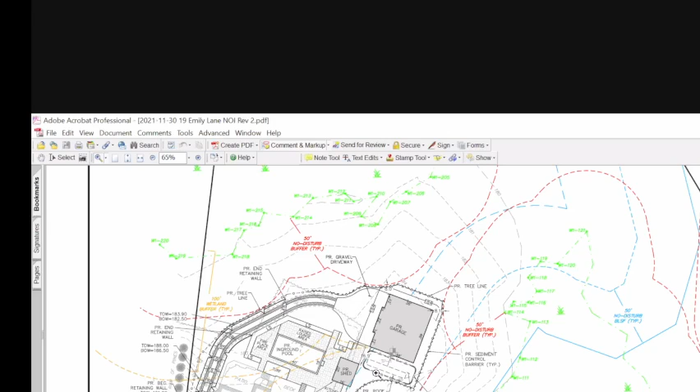We have also designed that rooftop infiltration system, which was originally proposed underneath the gravel driveway. We moved it off to the side of the garage, underneath the proposed stockpile area, so it wouldn't have to accommodate H20 loading and things like that. We've also provided the appropriate detail for that system. We have made the determination that the patio is going to be a pervious paver patio system.

So we can get some groundwater recharge right through the patio itself, and we provided some details on that. We've also updated our sediment control detail to reflect the new Town of Easton standard.

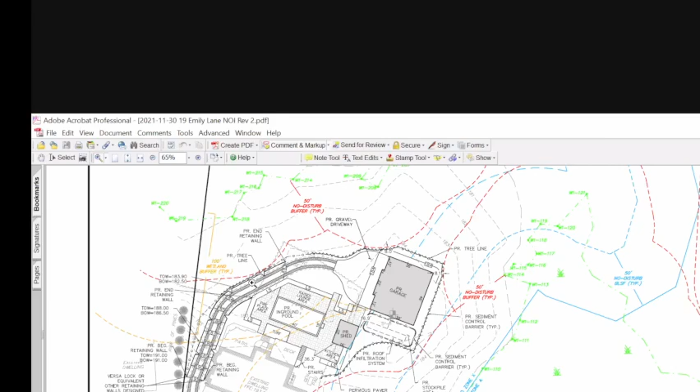We provided a detail for the modular block retaining wall proposed here, noting that the wall is greater than 4 feet. So the final design of that wall would be subject to a building permit and would be designed by a structural engineer. If need be, we could certainly condition that we provide that design prior to installation.

We provided the FEMA FIRM panel number and the LOMA that was approved for the property. They took this portion here and defined the Zone A floodplain boundary.

We've also provided an operations and maintenance plan for the proposed infiltration system in this location, and for the pervious paver patio system, giving the owners guidance on how to maintain it so it works in the long term.

We've also added something not listed in the letter we provided, but there is a note on the plan relative to utilities, which came from discussion between Ms. Carlino and myself: any utilities needed to access this garage, whether gas or electric, need to be installed within the approved limits of work. It would generally come off the existing house through the patio, or go underneath the driveway, but in no case would we extend beyond what we're showing for the limits of work without another authorization from the commission.

The letter we provided also summarizes anticipated stormwater impacts, and the takeaway is that anything we propose could have an impervious aspect to it, whether it's the driveway, the garage, or the pool. We found some way to mitigate that.

The driveway will be constructed of two cobblestone pathways approximating the treads of the car tracks. The area in front of the garage, where there will be some maneuvering, will be gravel, so we can be as pervious as possible through the garage and driveway. The garage is proposed with a rooftop infiltration system, and the patio system will be pervious as well. So anything we can do to mitigate stormwater runoff, I feel we've done. I feel we've met the intention of the stormwater standards to the maximum extent practicable.

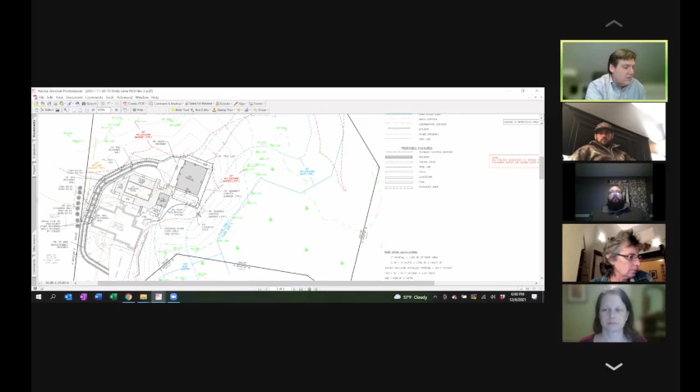I think you've addressed most of the questions I have. I think the stormwater issue is likely addressed here. Is there detail on the plan specifically about the construction of the gravel driveway, how much substructure there is, and how much crushed stone on top there is to be, and all that other stuff? Is that detail in the plans?

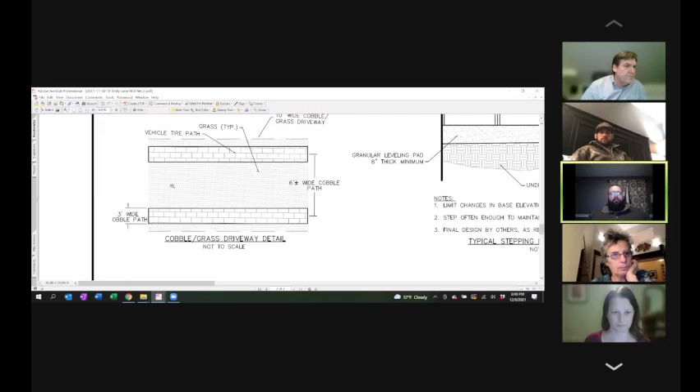No, actually there is not a detail for the driveway itself. There is a detail that shows the general layout of the driveway, that it'll have cobblestones over the vehicular tire paths with grass in between. We can certainly add a cross-sectional detail showing depths of aggregate for both here and the gravel area in front of the garage. Won't be a problem.

Okay, what would you normally propose in that situation? I'd say 8 inches of crushed, processed gravel underneath the base of the way, to provide a solid structural base so that it doesn't rut when we drive over it.

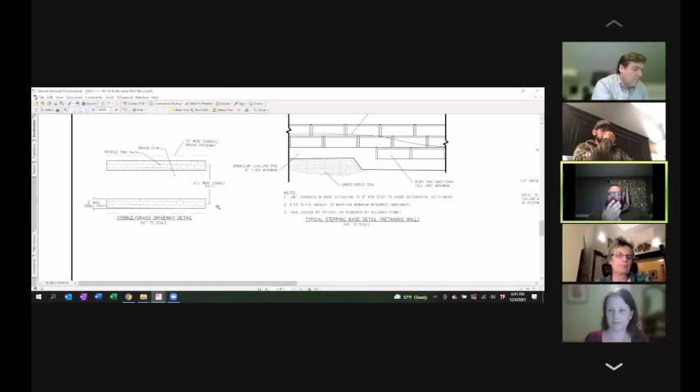I think the other question is, do we know - most of the area - can you go back to the main plan where you show the garage? Sure, let me blow it up for you in detail. How's that?

So most of the construction of the garage, in fact all of it, is what is currently wooded area, is that correct? That is correct, yes. So do we know exactly how many square feet of wooded area is being lost from this development, this project? Let me take a look.

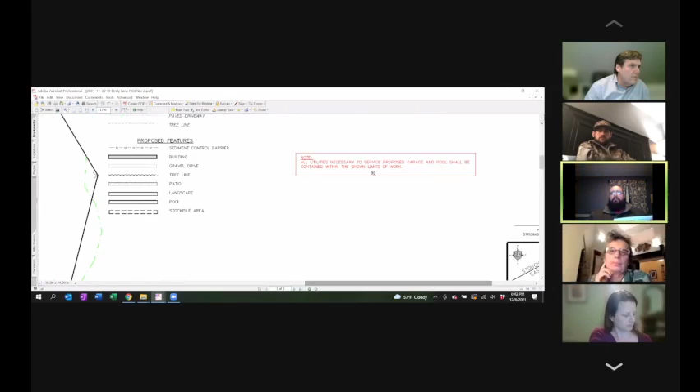We do give a breakdown in the 0 to 50. It looks like the chain - if you go to the table here, let me bring it up on the screen. If you can see this wooded area, between the 50 and 100 foot buffer zone, the existing wooded area is 27 and change, the proposed area will be 21 and change. So we have a differential of minus almost 6,500 square feet of wooded area as a result of the proposed disturbances.

Okay, that's good to know. So before I ask more questions, I'll propose opening the floor to other members here. So does anybody have any questions?

Sure, I do. Hi, Carol. Yes, thank you. So to follow on, Mr. Chair, from your point about the loss of habitat area - that 6,450 square feet of woods, Mr. Diaz, that's habitat. That's trees, that's native soils, that's a layer likely of some organic matter on top of that. All of that is habitat, and pretty much wherever there's good habitat, there are animals, there's wildlife. So I'd like to see your evidence, given that the entire buffer zone, not just the inner 50 feet - what's your evidence that there's no adverse effect upon wildlife or wildlife habitat when you're removing 6,450 feet of woods?

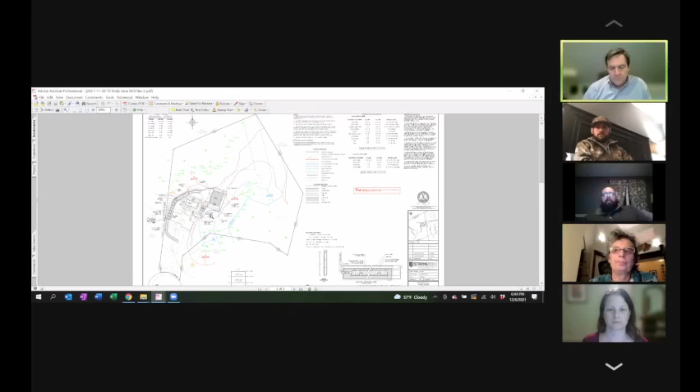Or otherwise habitat. I don't have that exact figure off the top of my head, but I think if we compare that to the 6,450 of woods we're removing, we're going to find that we're removing a very small percentage of habitat. Within the outer 50-foot buffer zone, where we're allowed to work without a waiver, I think there's a practical argument to be made that we're leaving plenty of habitat behind, so to speak, for lack of a better way to put it.

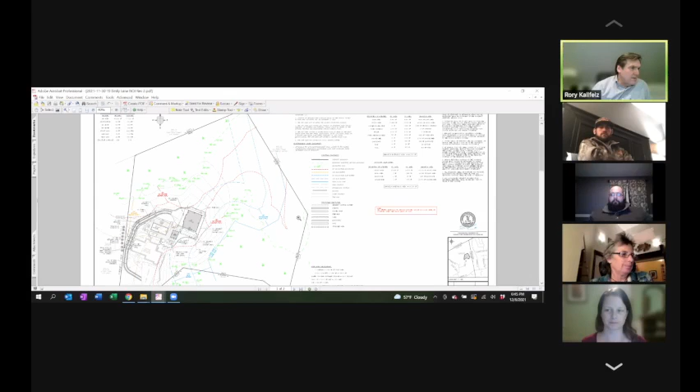Yeah, I'm just trying to make a rough calculation to give us a percent. If we say that, let's use 50,000 square feet as a previously disturbed area - just to get us to a number. That's fair, I'm not asking us to calculate exactly, just getting this in the ballpark. So that would leave us with 120,000 square feet, so that's a 5.4% area. It's much less than 10% for sure, so I think there's some reasonableness standard there that would allow us to draw some conclusion that the impact to habitat, while not zero, is minimal.

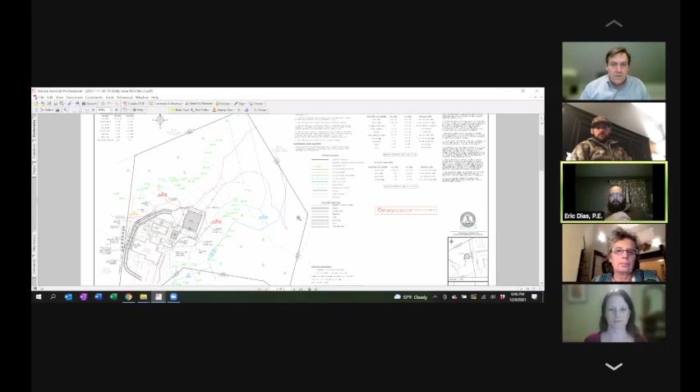So from that standpoint, just using rough numbers, I would concur with that. I think those rough numbers are fair. Certainly, if we needed to, we could zero in on them a little bit more, but I don't think we're too far off the mark there. You're probably one point one way or the other. I don't think you'd get very much further off, even if it's two points. It's still well under ten.

Okay, Carol, any other questions? Sure, thank you. So...

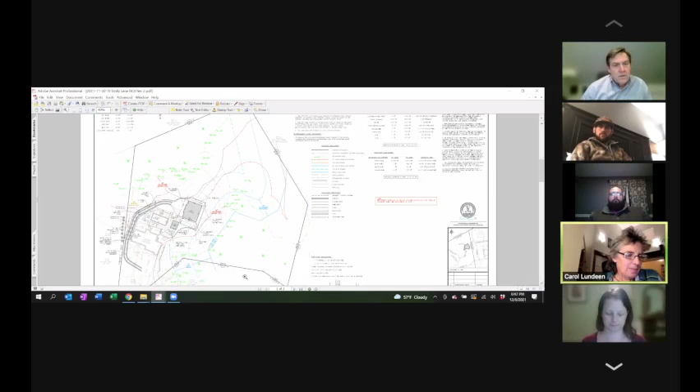I don't personally like going down the path of saying this is the percent or this is the area of the habitat that will be removed. What the regulations say is there shall be no adverse effects upon any of the bylaw wetland values. And what does 'no' mean? Does no mean anything but zero?

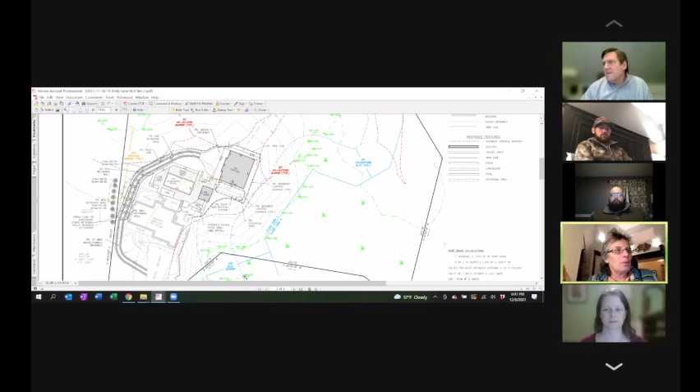So let me ask you this, imagine your neighborhood. Just take it from the animal experience to the human experience: what happens if a bulldozer shows up in your neighborhood one day and takes out 5% of your neighborhood? The people living in those houses, what happens to them? How do animals not get to continue to live in their homes?

How is removing habitat from a resource area, which has a presumption of significance, not an adverse effect? We're not talking about wildlife population. We don't have a performance standard to that level, but we do have a requirement of a burden of proof that shows at least a preponderance of evidence. And the commission, in the form of the NACC Wetlands Buffer Zone Guidebook, clearly says that 50 feet is not enough for any wildlife.

So just to clarify on one thing here: the performance standard on the outer 50 is that activities within the outer 50 feet of a buffer zone shall not adversely affect the form or function of the adjacent bylaw resource area or the inner 50 no-disturbance zone of the buffer zone. It does not say no effect, just no. It says adversely affect.

I agree with you, and that's the performance standard. However, the applicant must meet the burden of proof, which outside of the inner 50 feet, I think, is a preponderance of evidence. Unlike in a waiver situation, it's evidence that is without doubt or uncertainty. So I just want to be very clear that it is zero as the only answer here. I don't think there's discretion involved as to whether or not it's adversely impacting the outer 50 in the resource area.

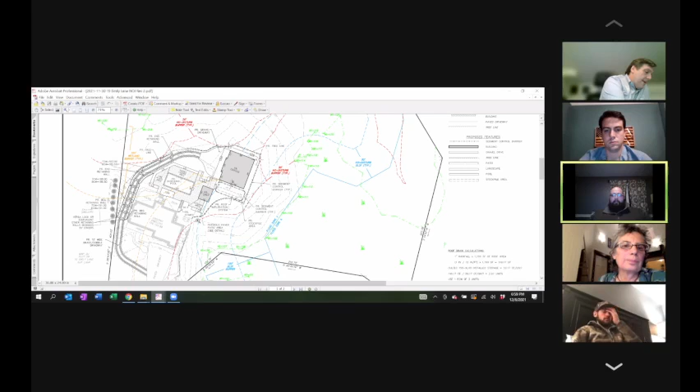So on the other side of the retaining wall, that you'll get a structural engineer for, what's the slope over there? The natural slope of the land. In this area here, it's following probably a 4 or 5 to 1, and then it looks like it's evening out. I don't have a scale with me, but there's probably 5 or 10% within the buffer zone that won't be disturbed.

So what's the slope on the northwest side of the proposed retaining wall, please? Northwest in this location here. The northwest perimeter, that's probably a 4 or 5 to 1 slope, so 5 to 1 would be 20%. Okay, so 20%.

Looking back to page 22, table 2 of the NACC Wetlands Buffer Zone Guidebook, 20% requires an additional buffer multiplier of 1.4 in order for the buffer to do its job.

Okay, but that is a slope that's in an existing lawn area now that we're not going to be disturbing, right? We're not going to be changing that slope. That slope is as it exists now. It's an existing lawn, grass slope. We're not creating that slope. That slope's already there.

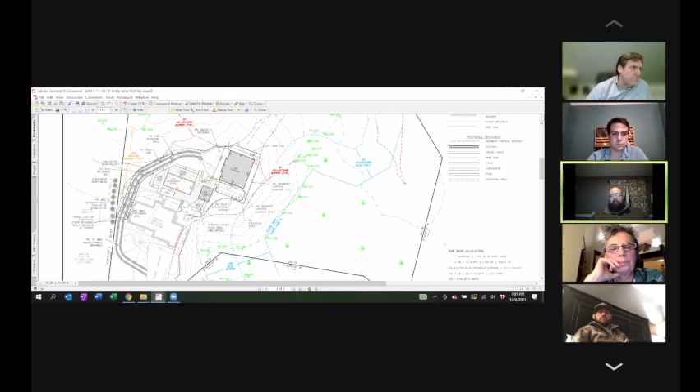Okay, but how will it be impacted by having the retaining wall built? The slope won't change. The same contours are just going to run right into the bottom of the retaining wall, and the slope on top of the retaining wall will be directed down toward the gravel area of the driveway. So it won't just sheet over the top of the wall and go that way. It's going to follow my cursor down this way and then go off into the buffer zone.

We'll have additional area to be treated and things like that. Say that again about additional area to be treated? It'll have a longer flow path, basically. It's not just going to jump the wall and flow right down this slope where you see it here.

It's going to ride the wall, come down the driveway, and then when it gets to this area here where the wall ends, it'll be discharged along its natural course to the 50-foot buffer zone, where it'll then be treated through overland flow and vegetation in the 50-foot buffer zone before it goes off to the resource area.

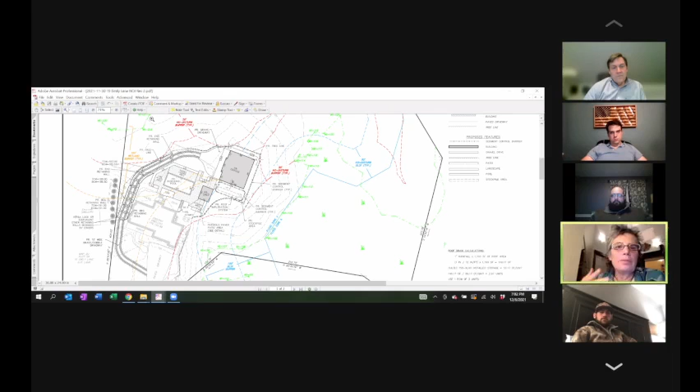Right, thank you. And so what is your evidence that that amount of treatment, that distance, is enough? You know, I will say that I haven't prepared exact evidence with forms and figures for this. This is also not subject to stormwater management criteria, being a single-family house.

I think that the engineering presumption and the reasonable determination is that this is essentially a pervious driveway, that we are maximizing the contact area of overland flow for as much as we possibly can. I would say that based on that, we have met the intent of the stormwater standards to the maximum extent practicable, even though they do not apply to this project.

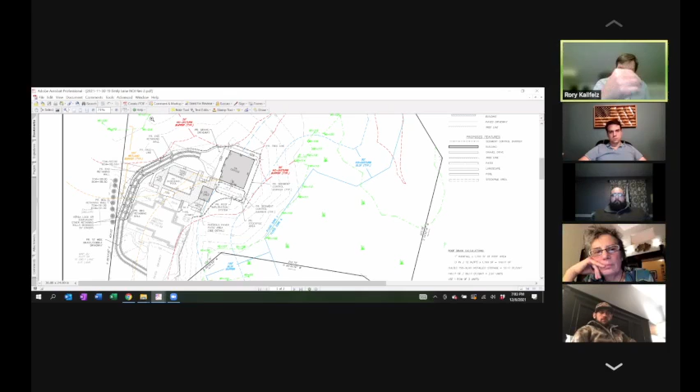Okay, thank you. Any further questions from the commission? Also, any comments from the public? Raise your hand or put something into the Q&A box.

Okay, so I'm just trying to go through my list here. So, Jennifer, can I ask a question before we go to close the hearing, or not?

We had agreed that we would likely condition the design of the retaining wall to be presented prior to work as part of the condition. The other thing that was raised as part of this was a cross-section of the driveway design.

It seemed to me that the proposed design is sufficient to maintain the pervious nature of the area. So do you think it's reasonable for us to condition that if we were to move forward? I do. We're just talking about a detail that's not that substantial that you would need to wait. Very good.

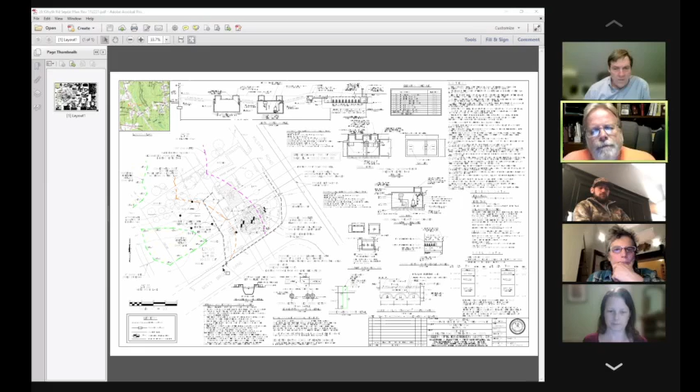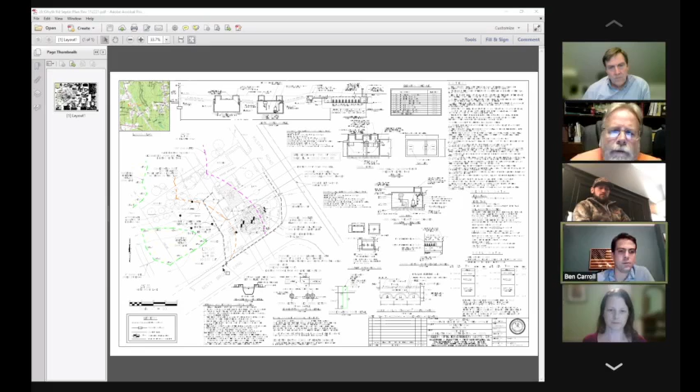We've proposed silt sacks at these two catch basins. There's quite a distance to the catch basin down Misty Brook, so what I've spec'd out are straw bale check dams - basically putting down some filter fabric and setting a couple of straw bales in the gutter line, which gives an opportunity to capture any siltation that might be going down the street. Sorry to interrupt, would you mind zooming in a little bit on this left side? Sure. Oops, wrong way, sorry.

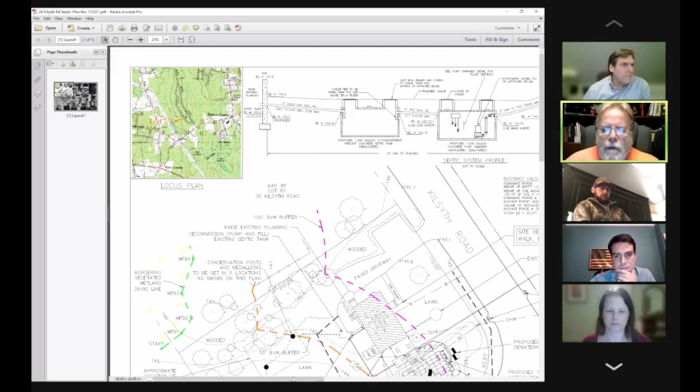I'm sorry, yeah. Thank you. I apologize. So again, these are the straw bale check dams I was mentioning.

We do have a dewatering pit located up in this location. We have conservation markers that basically run along the edge of the existing lawn. At this point, I'd be happy to answer any questions.

George had already made the plan revision we requested, so that part is all set, showing the pipe in the bordering vegetated wetland. During the inspection, I noticed a few brush piles and some leaves in the wetland itself, but the homeowner was there, so we reviewed not putting things in the wetland. When we do the pre-construction meeting, we'll look at where those five markers make the most sense for her.

George, are they going to come in through the existing path off Misty Brook Lane with the vehicles? Probably not, I'm thinking they'll come in right in this area. Over the curb, though? More than likely, yes. She has not secured a contractor yet. So if they do that, we want to make sure the sediment control can move in that location so the trucks can go in and out instead of driving over it.

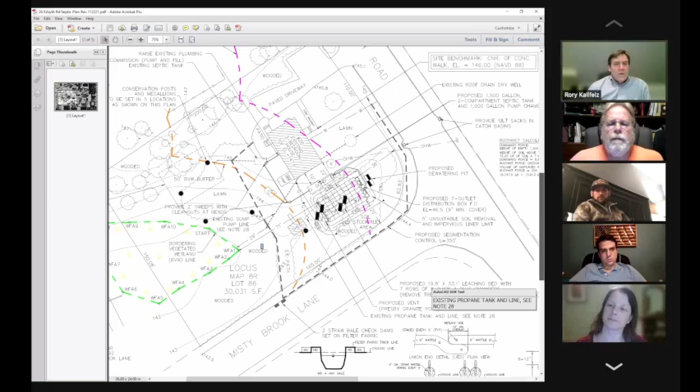So George, one of the things you noted here is that this is going into a moderately wooded area, right? There's probably a little stand of trees there. Yeah, there's like three or four trees in here that are going to need to be removed. And you're trying to retain some of the trees at the front of that. That's one of the things I was a little concerned about. Interestingly enough, one of the trees has a little medallion on it.

It's a little sign, talks about it being a backyard wildlife habitat or something. It was sort of interesting - it looked like a school child inspecting the area with their parents, and I'd like to preserve that as much as possible. Unfortunately, we just have all these different things squeezed between, and my client and I specifically talked about trying to maintain some woods up here.

We have a gas line here, we have a shed, it's just this, and then it's sort of a balancing act, as you know. Yeah, absolutely. I know that when I was out there, I looked at it from my own perspective, went back to the plan and said, okay, why did they choose this location? I saw the dry well, the water line, the overhead wires, and I also looked at the existing location of the existing system, which is inside the inner 50. This is one of those things where there is some loss here, but I don't know that there's a better choice, other than tearing up the driveway and putting it under the driveway, which doesn't seem to make a lot of sense either.

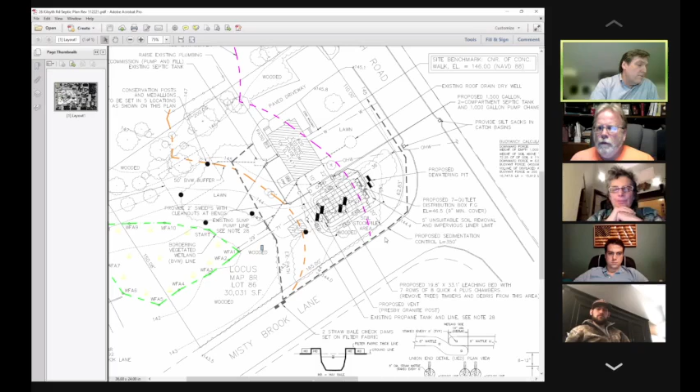Any further comments, deliberation? Seeing none, I make a motion to issue a permit for work and order of conditions for 26 Kilsyth Road. Carroll, second. Roll call vote: Kalifelz, aye. Carroll, aye. Lundin, aye. Stady, aye. Kalifelz with the motion, Carroll second, 4-0.

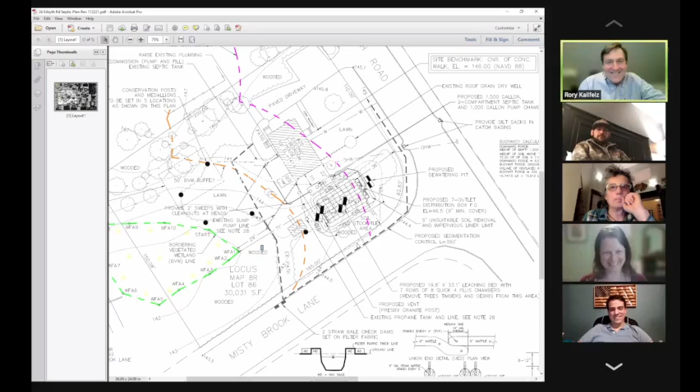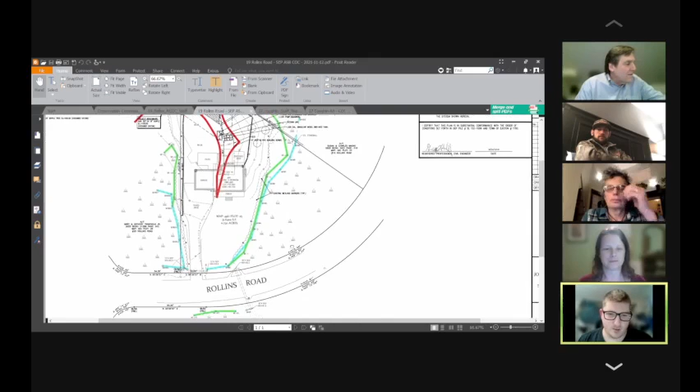Alright, you guys can see Jennifer? Can you guys see that? Yeah, okay. So I'm Josh White from Jacobs Driscoll Engineering, and we prepared this certificate of compliance as-built plan for you. This is for 19 Rollins Road. You can see the wetlands and mean annual high water all around the property.

The septic system was installed in the back. It's got the single air treatment tank with the pump chamber and the field right here. The perimeter sediment controls are still in place when we did this survey. I believe they're still in place today. The whole backyard was seeded and loamed, and everything is stabilized.

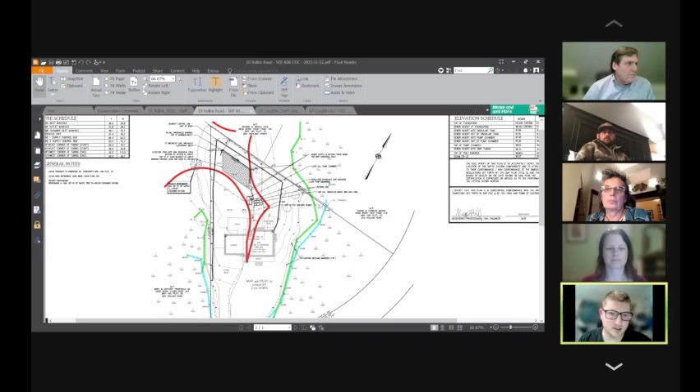Around the perimeter, starting at the driveway, I forget how many there were, but there's a bunch of markers. Let's just put it this way: there are too many. Yes, there's a lot. There's a lot of markers with posts with markers on them. Yeah, that's pretty much this one.

Jennifer, that's correct, it is stabilized. All the markers are in place, and the homeowner was there when I did the inspection. I did let her know that I would work with them on editing a little bit of those markers so it's a little more visually appealing.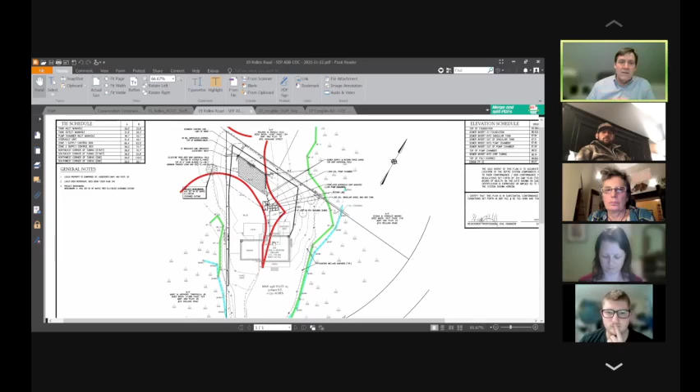They'll get overgrown by the brush, but somewhere in between, because many of these are 2-3 feet into the lawn, and they're gonna have to run the mower around them. It's really just gonna be pretty obstructive, to be honest. And I'm glad Jennifer's gonna try and work with the homeowner. So that's my comment there as well.

So, any other comments? No, that's ready for a full certificate. Okay, so I make a motion to issue a certificate of compliance for 19 Rollins Road. What do you say? Roll call vote. Kalifez, aye. Carroll, aye. Lundeen, aye. Spadea, aye. Kalifez with the motion, Spadea with the second, 4-0.

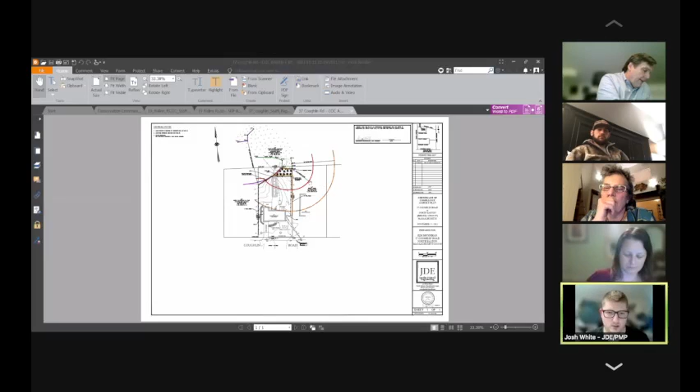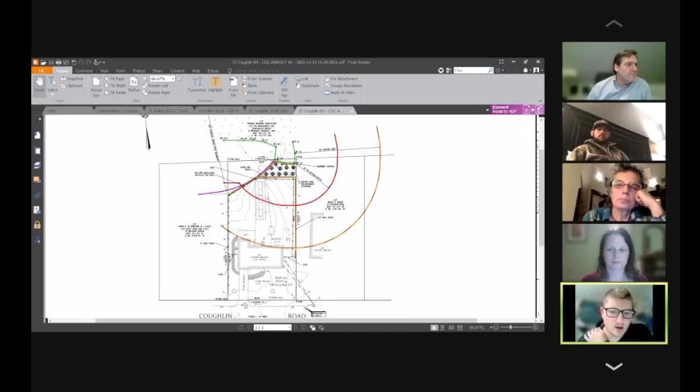So again, Josh from Jacob Chipko Engineering. So this is for 37 Coughlin Road. We submitted an NOI for our client to do some maintenance in the backyard and remove some vegetation that was overgrown in this area and in this area. And she removed and replaced an old fence that was fallen down and replaced it with a new 6-foot vinyl fence and a chain link fence along the back.

One of the... so this back area is all stabilized. The grass is growing really nice when we were out there doing the survey. The perimeter sediment controls were still in place. I know Jennifer said that once we submitted this, they could be removed. I'm not sure if that's taken place yet. I'm gonna guess not.

There were wetland medallions we installed on the back fence, which were shown on the NOI plan. Those are there. As part of the NOI, we proposed some buffer zone enhancement plantings just because this project was within the 50-foot buffer zone, which is usually a no disturb zone. So we were given permission to do some plantings in there. From what we know, as we stated in our letter, they were planted sometime around April when most of the work was done, and then the fence was installed, I want to say like August sometime. There was a lot of delays on that.

So we were kind of out of the loop on that, and we didn't follow up on the number of reports for the plantings in the buffer zone area. The letter we submitted from the landscaping company that did the work was the only one we received, and it stated the number of plantings was there. So at the time, it appeared to be in compliance, and that's why we submitted this plan for the full COC.

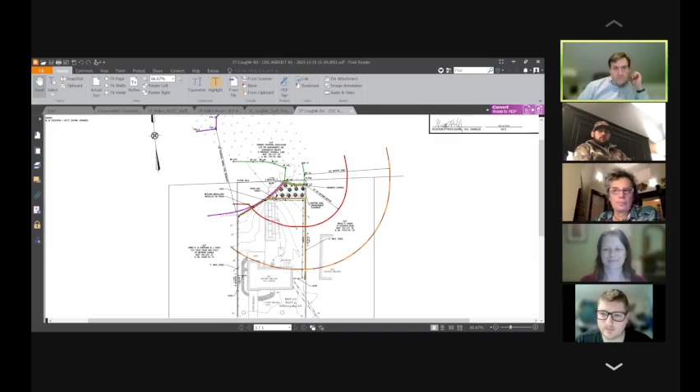I'm going to make a motion to issue a certificate of compliance for 37 Coughlin Road. I'll second. Roll call vote: Kalifez, aye. Carroll, aye. Lundeen, aye. Spadea, aye. Motion by Kalifez, seconded by Carroll, 4-0.

Okay, thanks, Josh. Thank you guys, we'll see you on the next one. Oh, well, you voted to close — did you vote to issue? I voted to issue the certificate. Thank you.

11 Glen Road, this certificate — this is a partial certificate request. They requested to continue to the next meeting. Oh, thank goodness. Yep, so you just take no action on that, you don't need a vote. Good enough, that's a good choice.

Okay, so next up is 1 Scotch Dam Road. This is an emergency certificate that was requested. I'll bring Mike Toohill up in case we have any questions.

So Jennifer, I don't know if you or Mike want to describe the situation. I'll leave it up to you. Mike's here. Hi, hi Mike, good evening, good evening. You don't want to give us the synopsis? Yeah, just give us a brief introduction for the record, then a brief synopsis of what occurred.

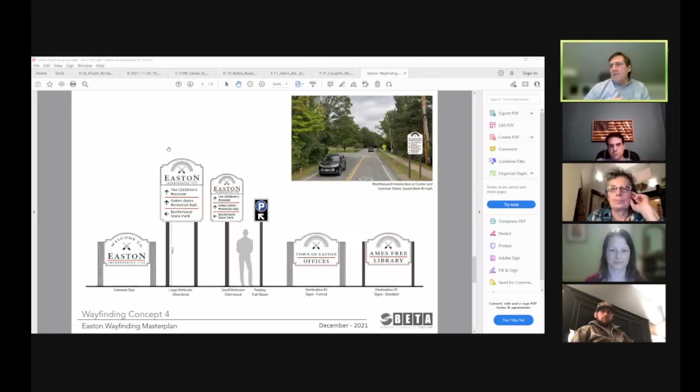Any questions? I can give you, so this is sort of the sense of what the signs look like in a family of signs. This is sort of a welcome sign. This is a big roadway sign. This is a little bit smaller directional sign. And these are some other signs, just to give you some sense, there'll be 4 or 5 different types of signs. Any questions? Came a long way since last meeting.

Yeah, and we actually have a meeting next week on it. So we met on this last Thursday. We have another meeting, I think it's this Thursday coming up. Not this week, next week. And I don't know, maybe this week.

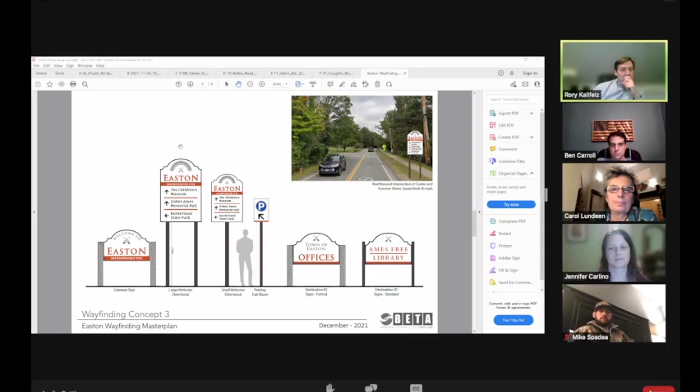I do like the orange. Yeah, the one thing about the orange that is a little bit, you can see it in this sign here, is that I think the printing's a little small there, and at night I think you'll get overwhelmed what that actually says by the darkness of it. But it could be different with reflective. You know, this is all reflective paint, so at night it would all light up.

So that's really what it is. But we have come along with this. A lot of time's been put into this, and the consultant has really listened well and come back with options that the group can really look forward to. And this is actually a large group, there's like 10 or 11 people that are part of it. So you can imagine trying to get to any sort of consensus is actually tough, but they've actually done a good job because we've been able to narrow it down, and finally get down to a couple of things and give them a couple little feedbacks, and they'll come back. They gave them 2, they'll probably come back with 3 or 4 variations of those 2. But we're the type of group that seems that everybody's getting a little bit of what they want. So it seems to work well.

That's it for me. Thanks for doing that. No, thank you.

The CPC committee representative. Right, that's me. There's nothing I can report from the executive session last time.

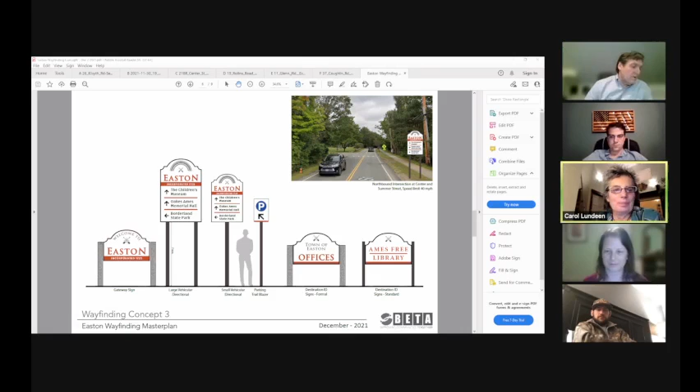Is there anything proposed on the public side that has any conservation impact? I don't believe so. Should there be? Should we be? You know, I mean, we really don't have a lot. I mean, we have big projects. She can't tell us. What's that? She can't tell us. No, I'm talking about from our standpoint.

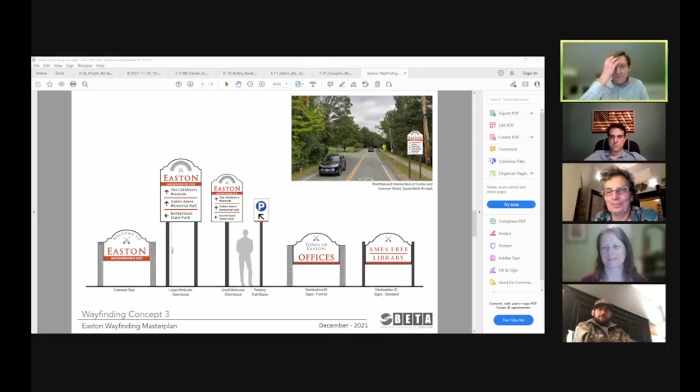You know, should we start thinking about next year's application process if there's some project that we need to get done? You know, we've got a project here that I hesitate to go back for more money when we need to get bids on the one we've got money for. So that's the only concern I have.

Right, what about? I'm sorry. What do we have for open projects that require CPA funds? Is it just the Red Mill Road, the barn? The barn, yeah, and then I don't think anything else has CPA funds associated with it. I think the Sam Wright Field is all state funds. What about the forestry report that we had done? Yeah. What are the actions in there?

You have a forestry report? Yeah, we paid for a forest report. Actually, there was a grant that allowed us to pay for it. I think we only put in a few thousand dollars and got the full forestry report. Oh, you mean the management plan? Yes, that came in. It's like this thick. I think we had a presentation on the summary of it. So we did. But really, as Carol says, what are we doing with it?

If we started, and I know you're just wrapping your hands around some of these things, I think the question should be maybe we could take a little look at it and see if there's part of that project we can implement over the next things. Some of this was that we felt like we might offset some of the cost by getting wood out of there. There's some good things in there, we need to thin out some of those woods to get multi-layer in our forest. So I think those are things we should think about. Carol, I appreciate you bringing it up. Jennifer, put it on that list.